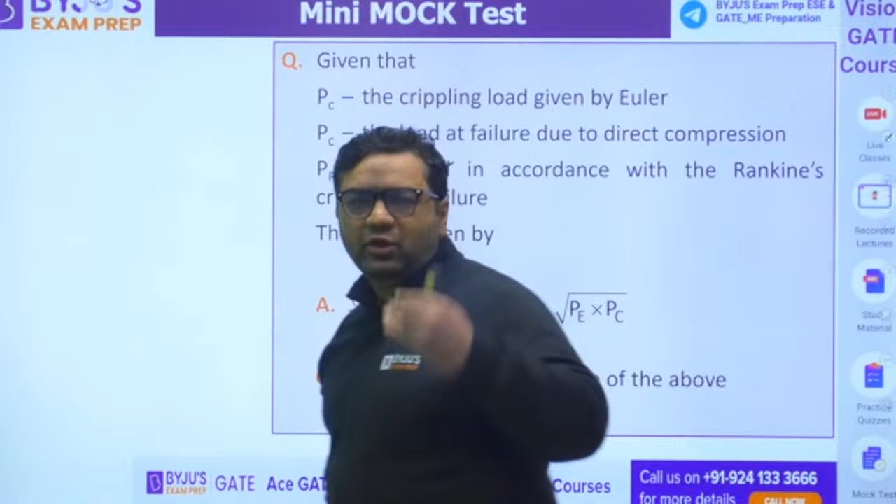Amit, don't worry. Admit card will come within today, tomorrow, because they are sending it one by one on mail. If it was coming on the website, it would be available at one instant only. But now as they are sending it, it will come today or tomorrow. Within 1-2 days, everybody will get it.

So guys, this is the very first question, which is from strength of materials. The topic is column - Rankine formula. This type of question has already been asked many times in ISRO papers. So tell me guys.

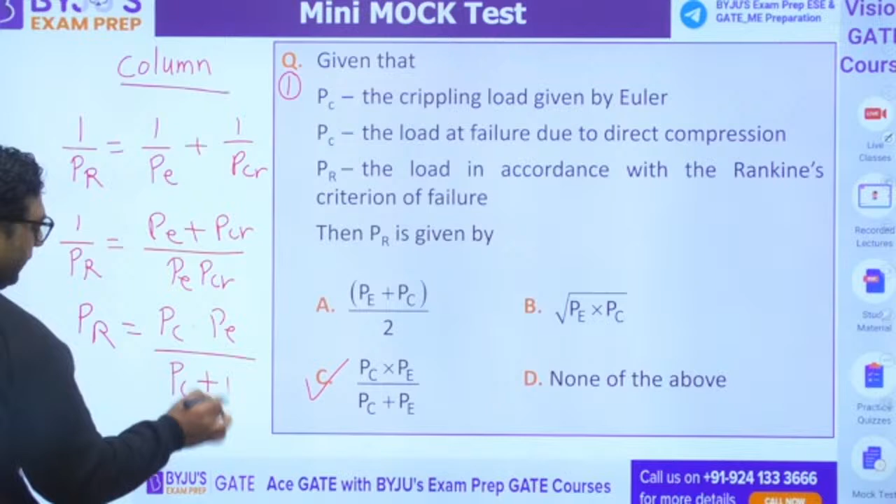Yes, Prathamesh, Amresh, Dhananjay, everybody agreed on C. Sarath, very good, and yes, you are correct. Answer is C, because when you write the Rankine formula, it comes out to be 1 by Euler formula plus 1 by crushing strength. When you apply this and solve, 1 by PR comes as (PE plus PCR) by PE.PCR. So PR, that is the Rankine force, will be PC.PE by (PC plus PE). So the answer will be C for this.

That's correct. Moving to the next question. Very good, Anonymous, Jay. Moving to the next question.

Question number 2, guys, you can see this question. In this question, the bending moment M and torque are applied on a solid circular shaft. Just solve this.

Voice is coming, I was just checking that. Question number 2, guys: bending moment M and torque is applied on a solid circular shaft. If the maximum bending stress equals the maximum shear stress, they are asking what is the relation between bending moment and twisting moment.

Akanksha, then there is no problem, na? That is happening, ISRO is every time happening like that only. That's why the papers are also available. Madhuri is saying A, Amresh is saying A, Dhananjay is saying A.

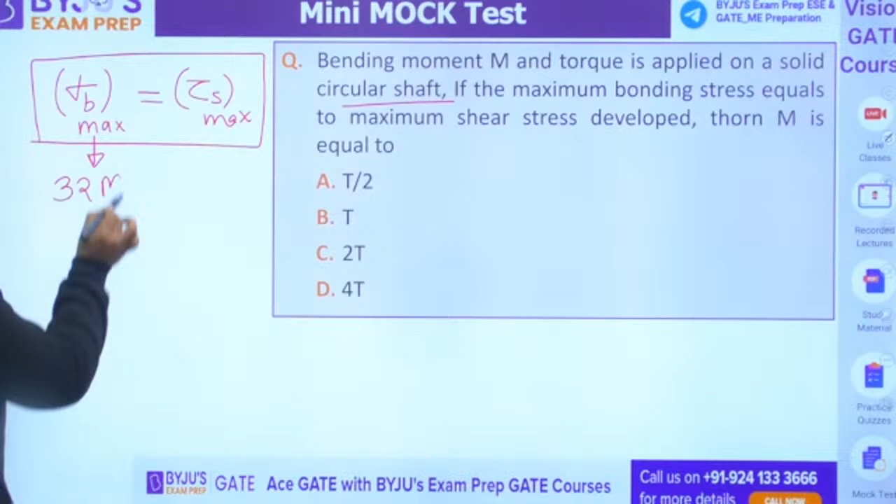The answer for this: you know the bending stress formula is 32M by pi d cube, and the twisting stress formula is 16T by pi d cube. So whenever you have a shaft like this, if you have a bending moment M, because of that the bending stress is this. And if a twisting couple is acting on the shaft, the formula is this. So if you know, pi d cube cancels out, this comes to 2. So M will be coming as T by 2, and I feel A is the correct answer. Dear, ISRO does not always have much calculative parts. Like this question, this is a PYQ of ISRO.

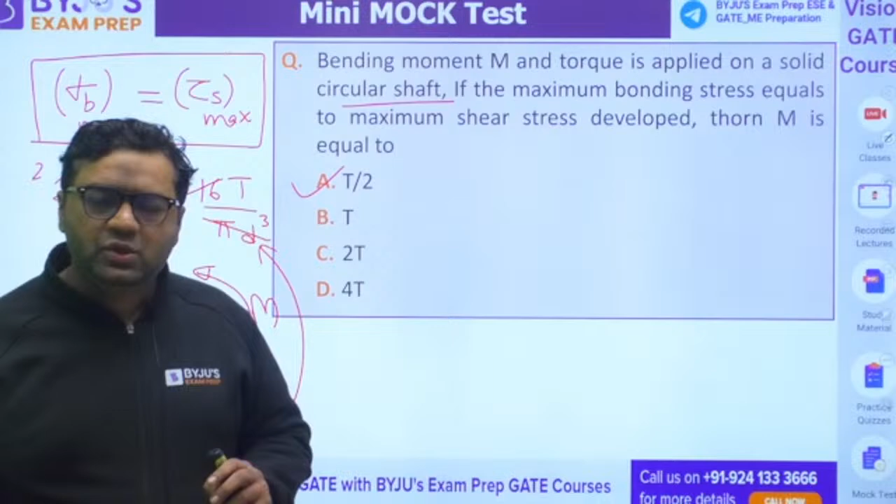So yes, some questions will be there in the form of numerical, but majority questions are conceptual. They are not asking mug-up kind of things. They are asking conceptual things like the previous 2 questions you have seen. That type of questions are more common in ISRO.

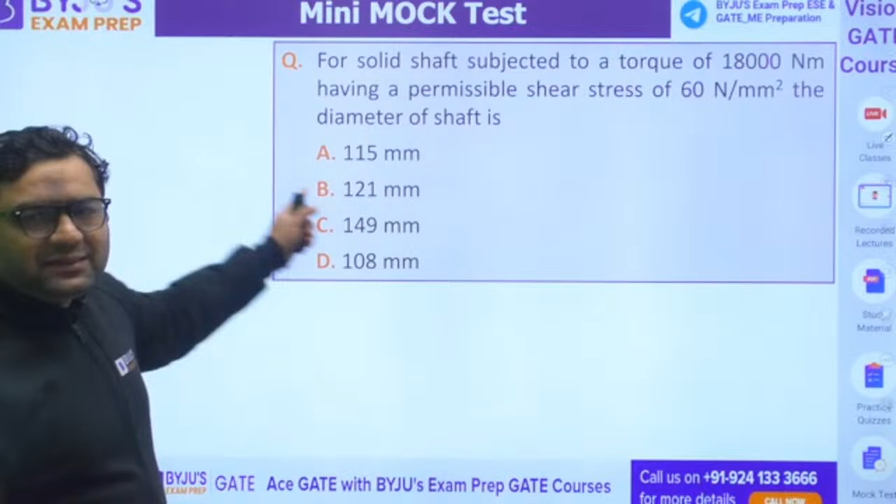So next is for a solid shaft subjected to a torque of 18,000 Newton meter having a permissible shear stress. This type of calculation can come in the paper, which are not very lengthy, but they will be checking with 5, 7, 8, 10 questions like that. So what would be the answer for this? They are saying for a solid shaft subjected to a torque of 18,000 Newton meter having permissible shear stress, you know that the induced maximum stress, we have just written the formula 16T by pi d cube.

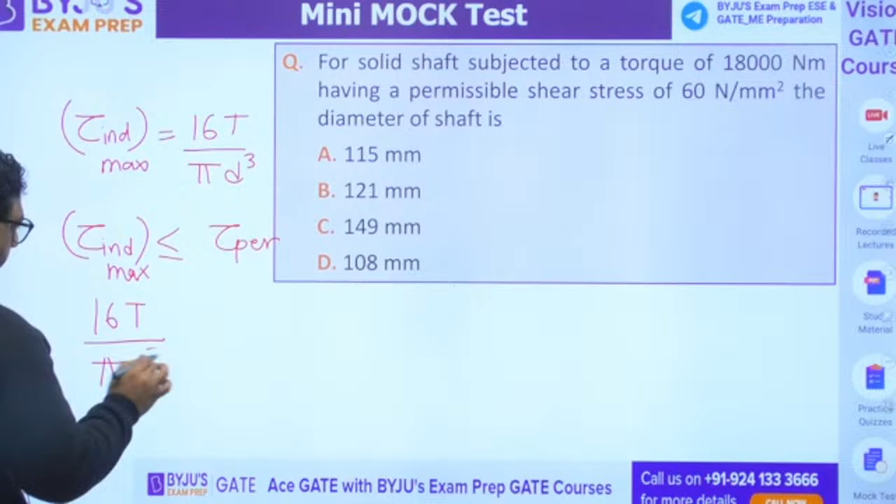So you would say the induced maximum stress is less than or equals to tau permissible. When we do that, you will be saying 16T by pi d cube is going to be less than or equals to, and here they have mentioned 60. So you just need to put the value and you will get the answer, diameter more than or equals to that, and that will give you the answer.

Sushmita is saying the answer is 115. What about others? Madhuri is saying A, very good. Sushmita and Madhuri have answered, what about others? Anonymous is also saying the answer is A, very good. Amresh and Dhananjay too. So I would like to say the answer is A.

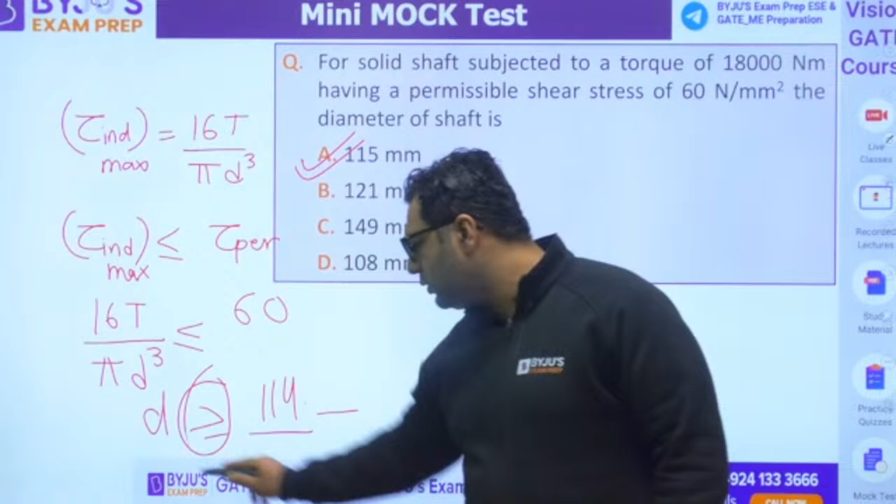It is coming out to be approximately 115, and as you can see it is more than or equals to. So if it is coming 114 point something, then the answer is going to be 115 because it is more than or equals to. So it's fine. If it is coming up to 115, the answer will be this. Answer will be A for this.

Moving to the next question. This is also a PYQ of ISRO. This question has appeared 3 times in ISRO, 3 times in ISRO. You can see what it is, shear forces. So this is a conceptual question, this is not a data based question. This is a conceptual question.

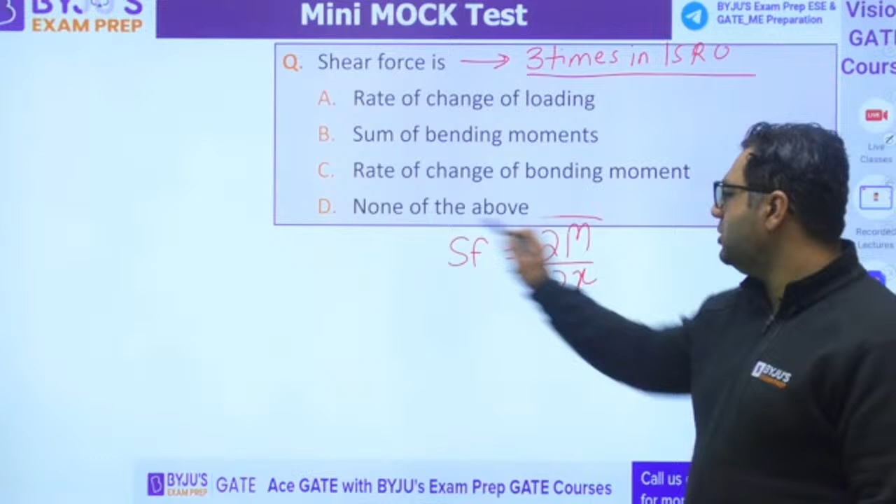Very good. So whenever we are looking for shear force, you already know that shear force is nothing but del M by del x. This is the relation between shear force and bending moment. So we will be saying C would be the right answer. Similarly, if they ask the relation between load and shear force, then load will be dV by dx, plus minus I am not writing, that is a matter of sign convention.

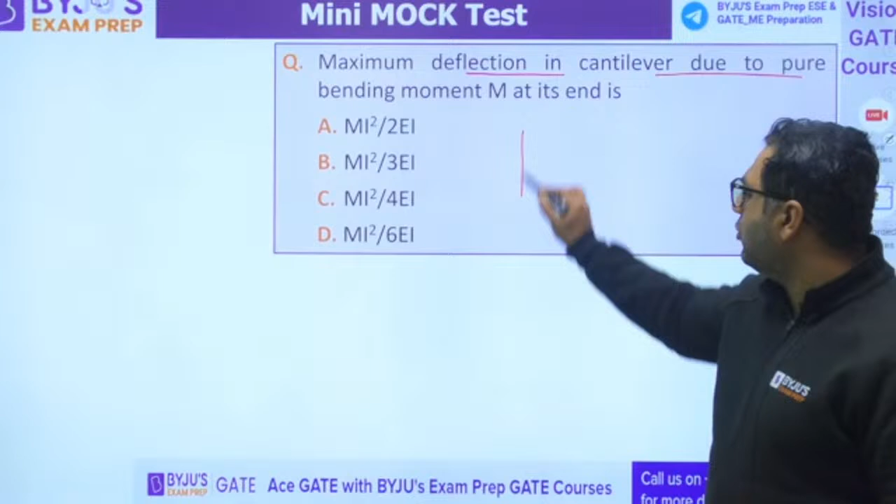Moving further, next question is maximum deflection in cantilever due to pure bending moment. This is also a standard table formula question, you can see that. So guys, in the next week we will be coming up with a full length mock test also, don't worry about that.

Very good, Aniket. Answer, you are saying B. All others are saying A. So the answer is A. When we are talking about this, this is the deflection.

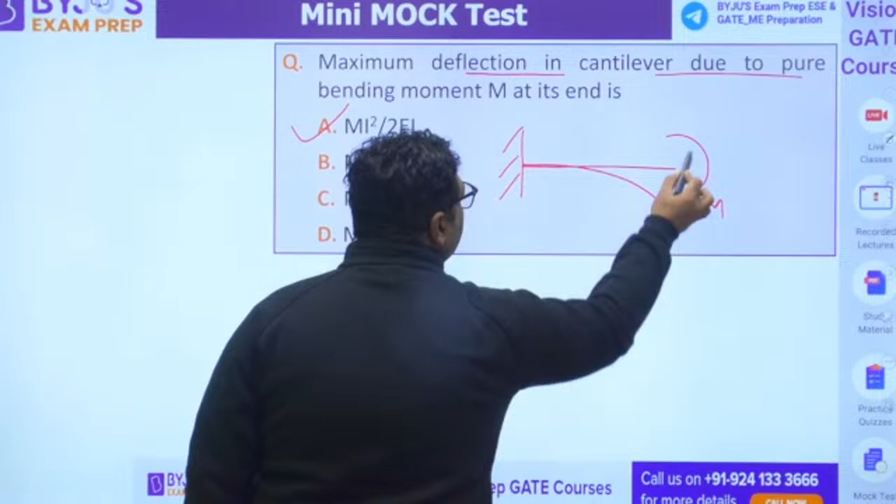So we would be writing deflection at A as minus ML square upon 2EI. Here minus indicates downward. And if you are finding out slope, it will be coming out to be ML upon EI. So for that you need to go for the standard table, 8 results, they come directly in the paper.

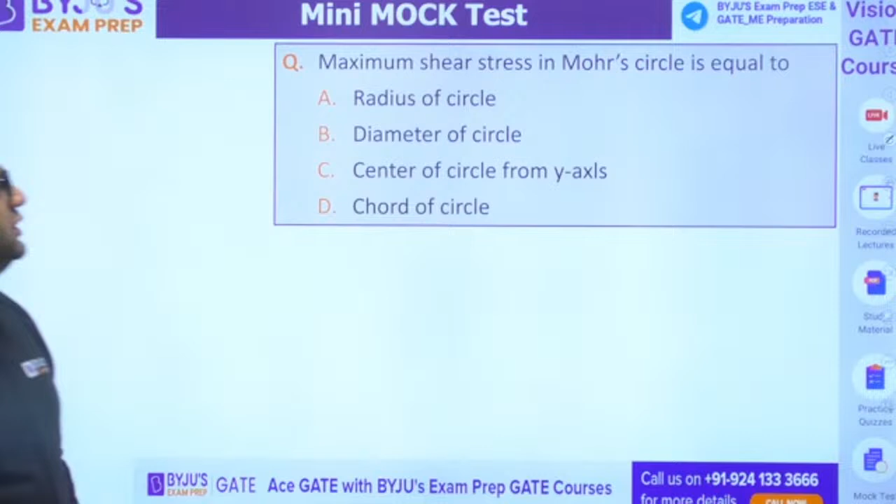Moving to the next question, guys. Next question is maximum shear stress in Mohr circle is equals to. This is also a PYQ of ISRO. So you may be thinking it is a very easy question, yes, they are asking some questions like that. 50% of questions in any paper are solvable by any student, after that only the difficulty level increases. 50% they make it such that if an average student is there, he can solve it.

Yes, you know that the maximum shear stress is nothing but given by the radius. This is the radius of the Mohr circle.

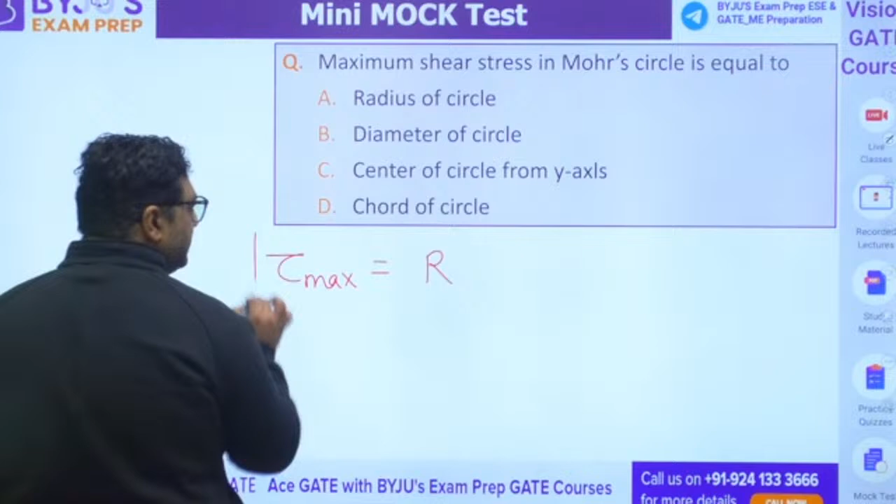So moving to the next question, guys. Next question is mathematics, next question is mathematics. The modulus of 1 plus cos alpha plus iota sin alpha, you need to tell the modulus of that. So you know, you can write this complex number 1 plus cos alpha plus iota sin alpha, and you know what the modulus is.

Square root of 1 plus cos alpha whole square plus sin alpha whole square. Solve it, apply some trigonometry and give the answer.

So this is question number 7, question number 7 it is, question number 7. Yes, what would be the answer?

Okay, Sarath is saying B. Sushmita is saying A. What about others? Sanket is saying B, very good. Thick skin is saying B. Tushar is saying B. Aniket is saying A.

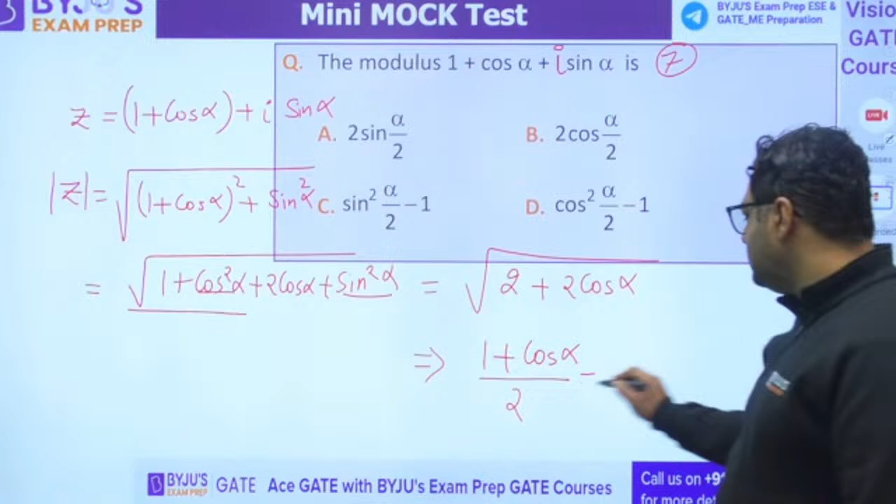Okay, let us see. So when you solve this, you will be getting 1 plus cos square alpha plus 2 cos alpha plus sin square alpha. Sin square alpha plus cos square alpha is going to be 1, so it will come out to be 2 plus 2 cos alpha. You already know that trigonometry relation: 1 plus cos alpha by 2 is cos square alpha by 2. So using this relation you will get the answer to be 2 cos alpha by 2.

B is the right answer. B will be the right answer for this. Very good, guys. Moving to question number 8.

Question number 8 from production. They are saying materials after cold working are subjected to the following process to relieve the stresses.

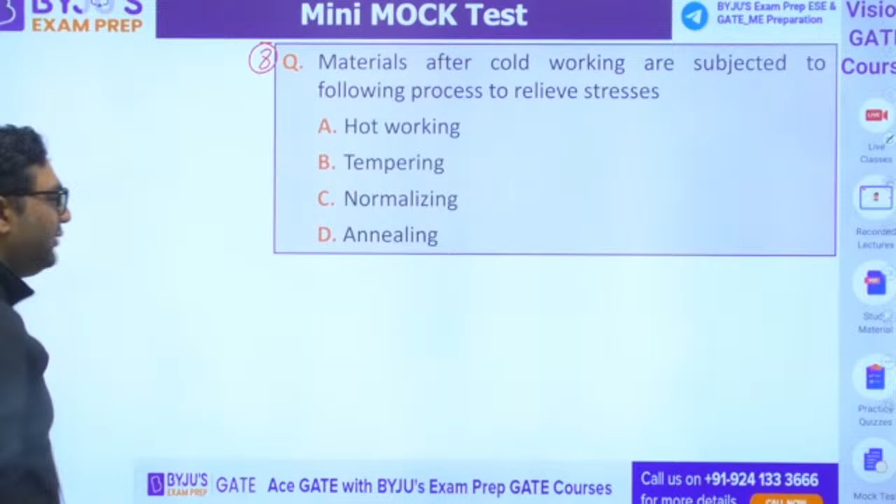Annealing. Annealing is done because whenever we go for cold working, ductility gets reduced. Strength increases, hardness increases, brittleness increases. So to improve the ductility, because if you talk about rolling or wire drawing, there are multi-pass operations, we need to improve the ductility. For that we go for annealing. And stresses also need to be relieved.

Question number 9, drop forging. This is also a PYQ. Some questions today I have taken from previous years. Okay, this is also a PYQ.

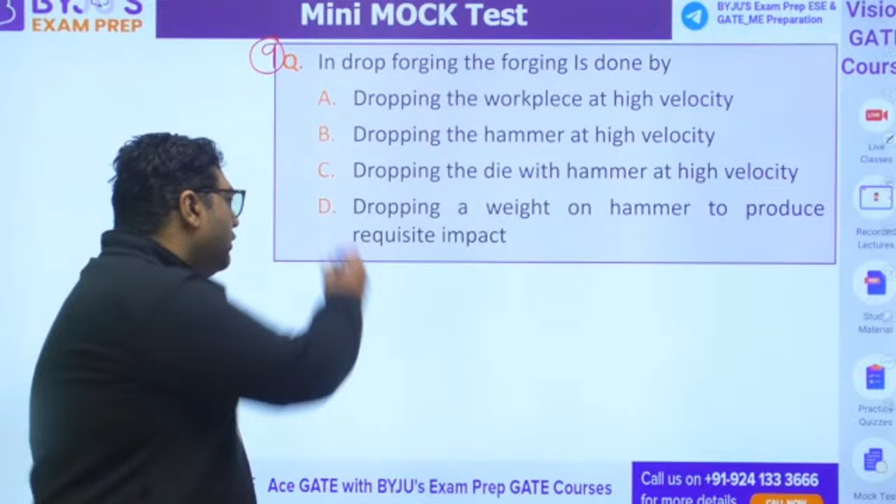So they are saying: dropping the workpiece at high velocity, dropping the hammer at high velocity, dropping the die with hammer at high velocity, dropping a weight on hammer. Actually, saying that dropping the weight on hammer is not correct, because the hammer itself is the weight which is going to fall over the die.

We are having the dies, like this is die, this is die. On the dies the hammer will come. This is hammer. So hammer itself is a weight, right? So the answer will be B for that. So B is the right answer. Okay, yes.

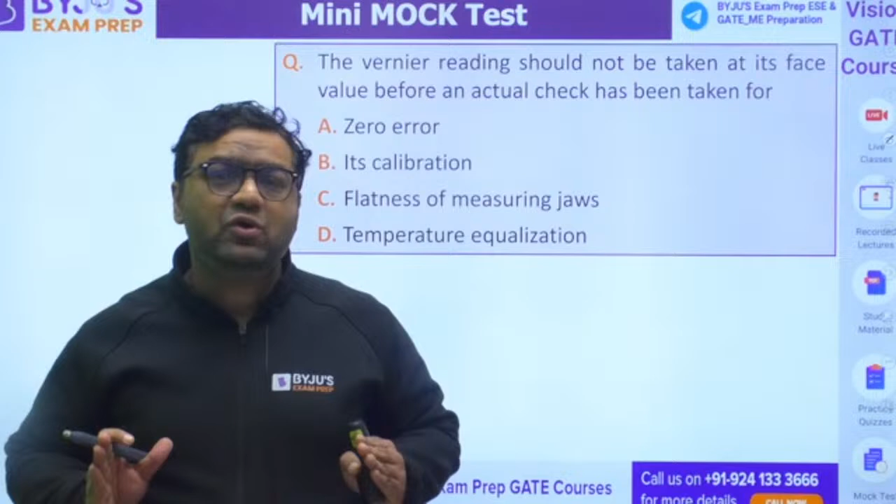So this time they are saying the vernier reading. This is from metrology inspection. The vernier reading should not be taken at its face value before an actual check has been made.

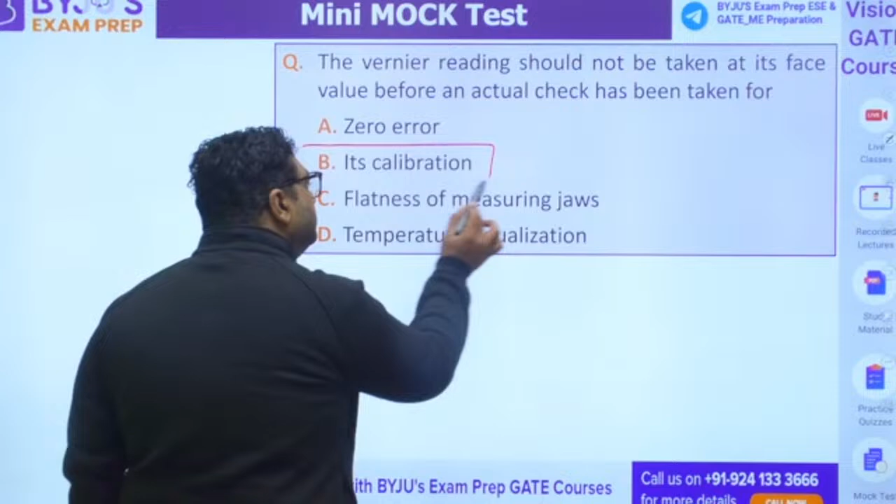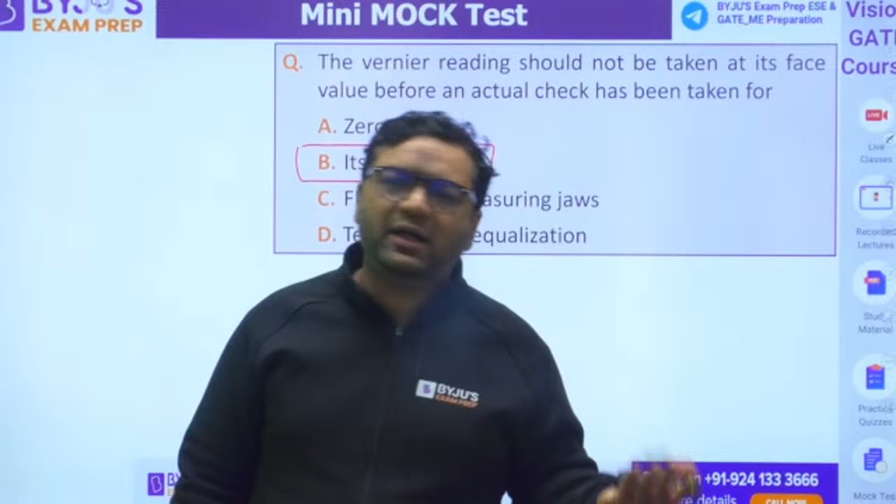Its calibration. Whenever we are going for any measurement, before that calibration is required. Because whether error will be coming or not, that is the secondary thing, but calibration is done. Even when you go to a Kirana shop and he is going to give you some sugar or anything, he first sets the weighing machine to zero, otherwise you will not get the correct thing. So that is why calibration is the first thing which is done.

So the answer will be B for this. Moving to the next question. The temperature of the sun can be measured using a. This is from thermodynamics.

Dear, actually whenever we are going to use any device, like a weighing machine, what will you do? First of all you will set the zero, right? Yes or no? So you will set the zero, otherwise that will not give you the correct reading.

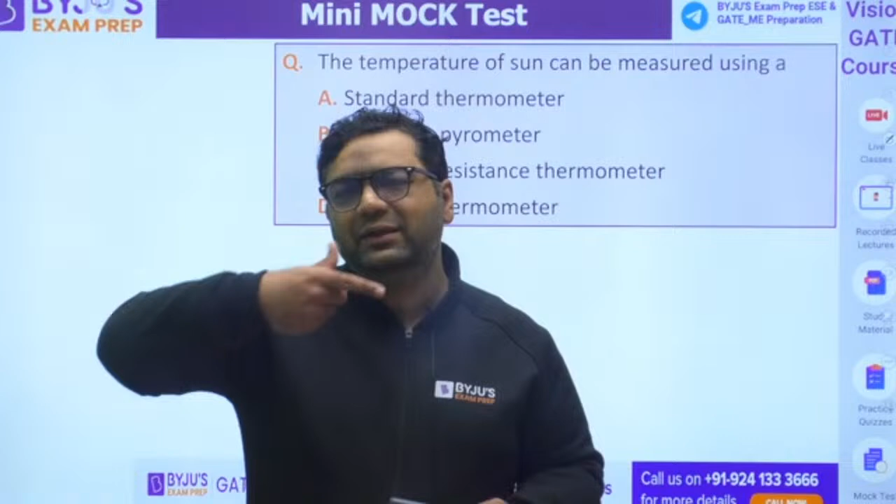Let us say I have used a vernier caliper before and on that already some gap is there. Then will you start without checking the calibration? Calibration means zero should be set on zero. Because if any problem is there previously in the device, that should not come into the calculation.

Okay, you got it? So the answer for this: the temperature of the sun can be measured by radiation pyrometer, because we cannot go and touch the sun to see the temperature. For that we need to go for...

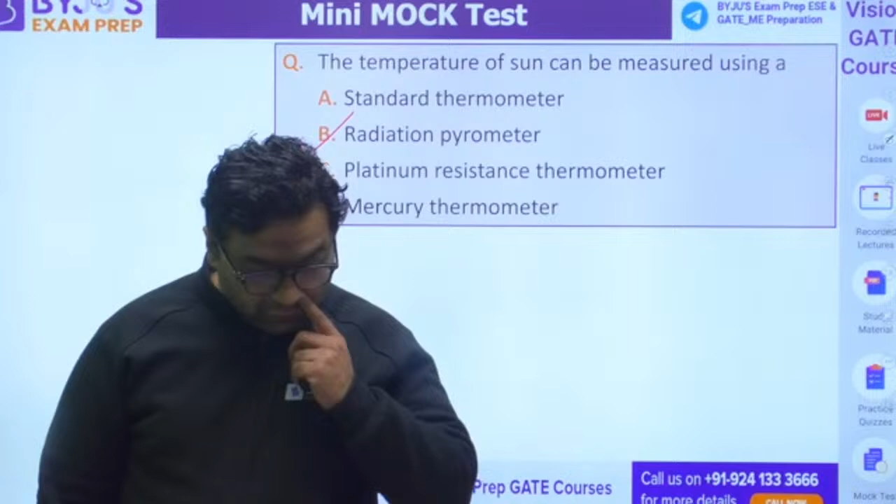Dear, this is question number 11. This is question number 11. Okay, moving to the next question. Question number 12, this is from engineering mechanics.

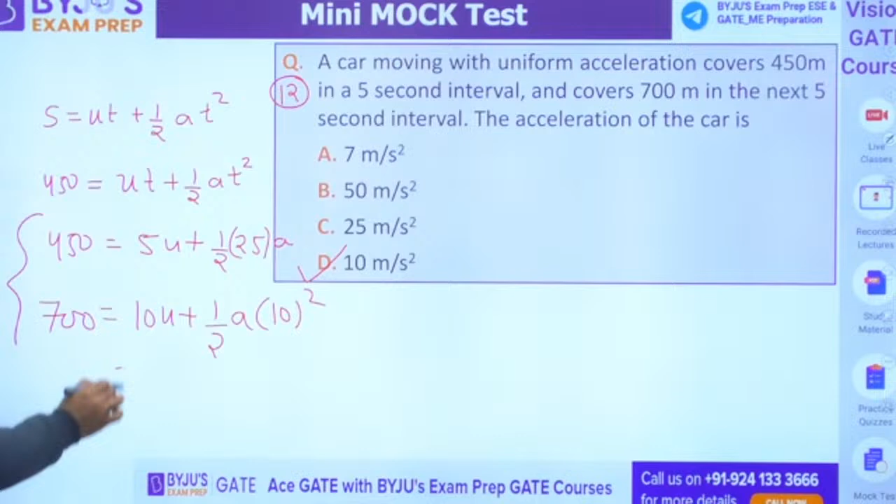So they are saying in the first 5 seconds, time is given as 5 seconds, so you will say 450 equals 5u plus half into 25a, since we don't know the initial speed. Then in the next 5 seconds it covers 700 meters, so 700 equals 10u plus half a into 10 squared. When you solve these two equations, you will get the value of u and value of a, and a will come out to be 10 meter per second square. D is the right answer.

Okay, moving to the next question, guys. Question number 13, this is also from engineering mechanics, and this question is also from PYQ. This is from ISRO 2010. Solve this question, guys.

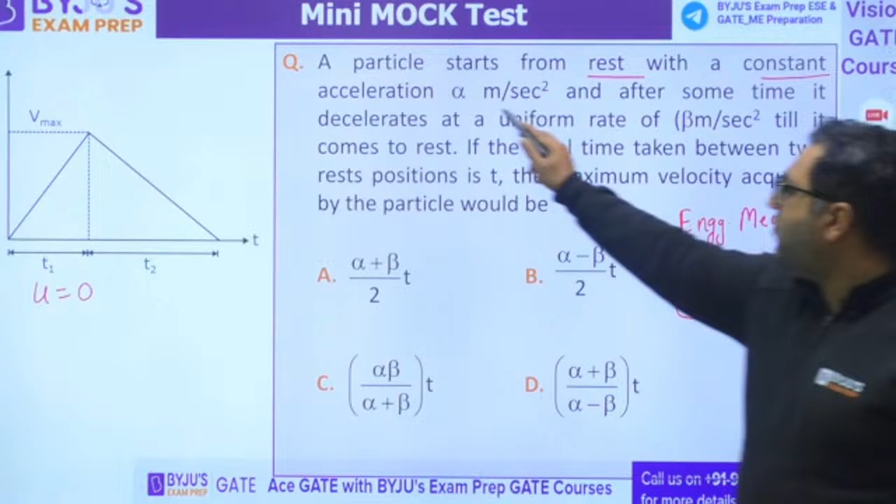So here some graph is given, 0 to T1, T1 to T2. Let us see how many of you give the right answer for this question. Already Sanket and Madhuri have given the answer as C, which is correct. A particle starts from rest, so obviously U is going to be 0, then has constant acceleration alpha meter per second square, and after some time it decelerates at a uniform rate of beta till it comes to rest. If the total time taken between the two rest positions is t, the maximum velocity acquired by the particle is... Yes, guys.

So you know that V equals U plus AT. If you apply that, velocity will come out to be alpha times T1. Also you can apply V equals U plus AT, U is 0, so you will have alpha T1 minus beta T2, because initially it is acceleration, then deceleration. So when you say T2 is nothing but T minus T1, putting this equation here, we find the initial velocity is 0, this is the final velocity, this is Vmax, and this is V at this location, which is also going to be 0. So you get alpha T1 equals beta T2, from here you can get the value of T1, put the value of T1 here, and you will get the answer to be C.

I feel everybody is getting this. Yes, everybody understood? C, very good. Shall we move further? Shall we move further?

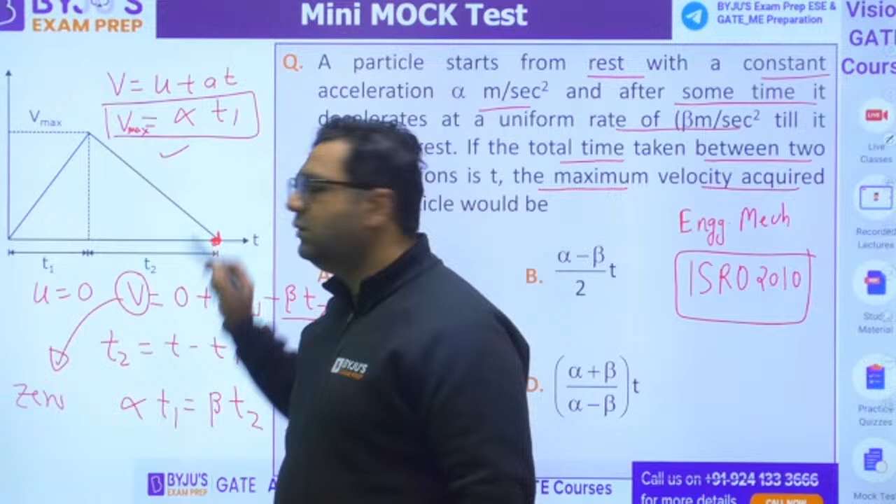I feel everybody understood, simple mechanics concept. Why is final velocity 0? Because you can see this is initial, this is final, starting from 0 and ending at 0. This is accelerated, this is retarded.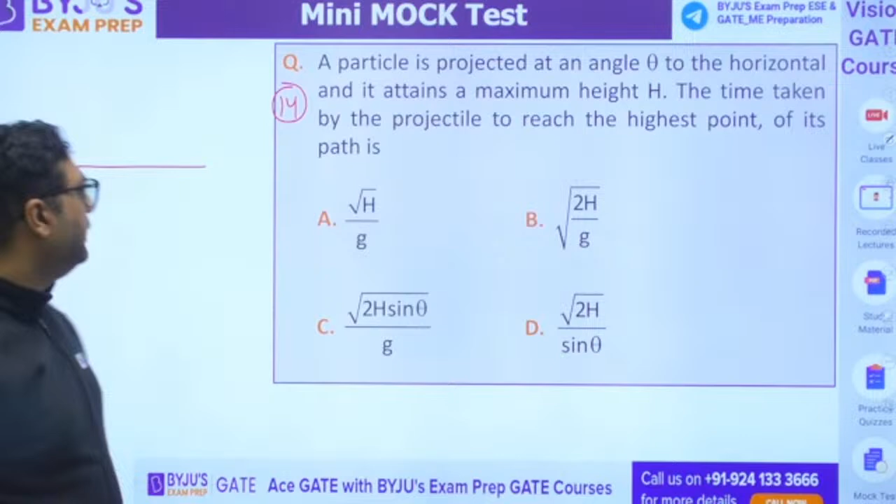Next question, guys, a simple question from projectile motion, engineering mechanics again. Question number 14, 16 questions are still left. A particle is projected at an angle of theta to the horizontal. It attains a maximum height h. The time taken by the projectile to reach the highest point of its path - so this is the projectile, with u and theta. They are asking the time taken. What would be the time taken, guys?

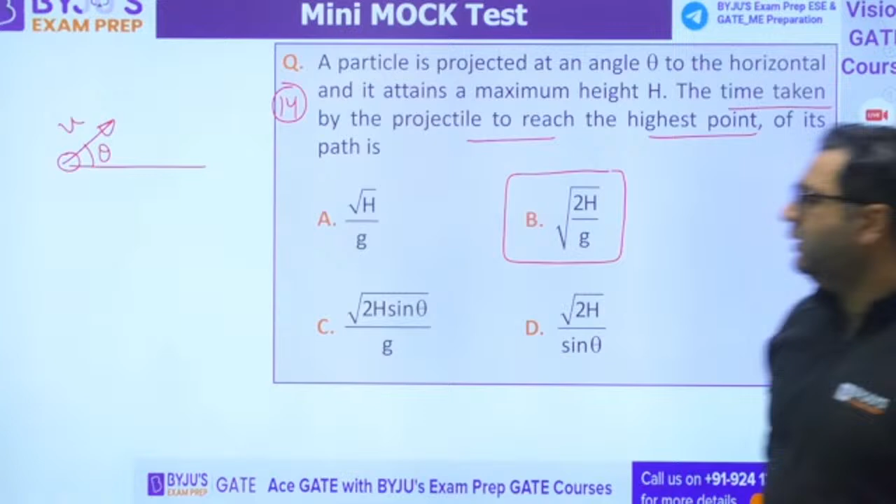Yes, everybody is getting B. This is a very simple and famous question, you would be getting the answer as B. They are asking you the time taken by the projectile to reach the highest point. So you assume the highest point has a height of h. This is the motion in the y direction, so uy is u sine theta, acceleration in the y direction is minus g, and the distance travelled is h. You need to find the time of ascent, so the answer comes out to be square root of 2h by g. I feel everybody can do this, it's a very easy question.

Moving further, next question is once again from strength of materials. This question says a cantilever beam AB of length L with uniform flexural rigidity EI has a bracket AC attached to its free end as shown in the figure. A vertical load is applied to the free end C of the bracket in order that the deflection of point A will be 0. Find the ratio of A to L.

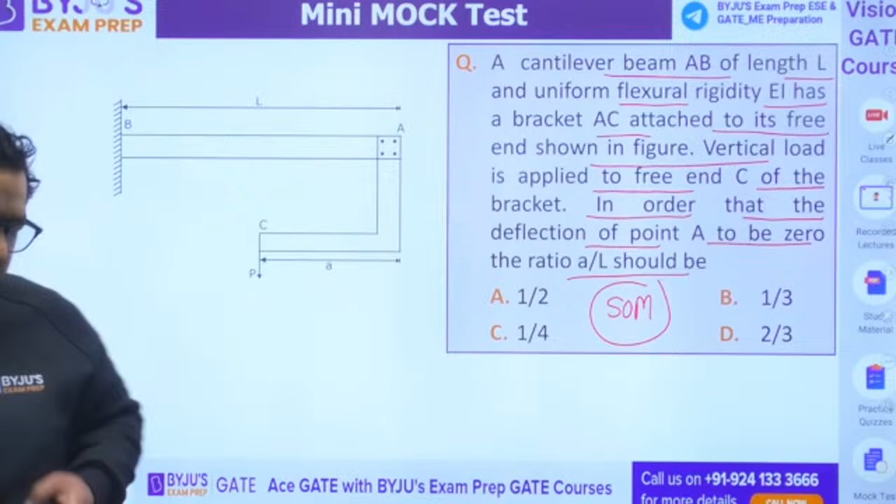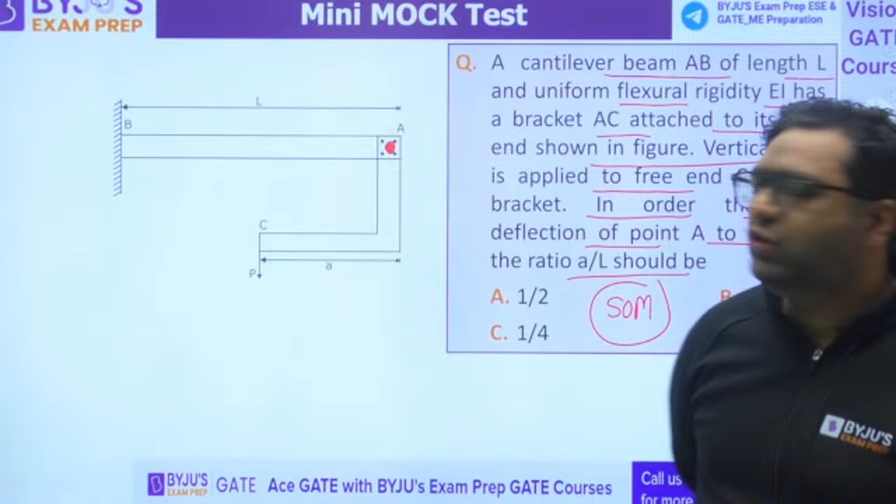This is a conceptual question, not very high on calculations, only standard results are required. They are saying the deflection of A is going to be 0, and this will be solved using the free body diagram. I can see Sanket has given the answer as D. What about others? Okay, Madhuri is also saying D, very good, very quick answer. What about others? How will you solve it? By free body diagram, so I am showing you the solution on the next slide.

So if you see, this is the figure given. This distance is A, this is L, and this is the load P. If I say this is A, this is B, this is C, I would be having the BC part separated, with P load acting on it. To balance this P, this AB beam will be holding the BC part with a reaction, and also this is creating a couple. So to balance that couple, a bending moment of P into A will also be applied. These are applied by the AB beam on BC.

The same will be replicated as Newton's third law of motion on the AB part. This is A, this is B. As this is acting upward, the reaction will come downward, and this is clockwise, so here we will have anti-clockwise, which is P into A. So now, to balance this, the AD beam will provide a P in this direction and a couple in this direction, once again P into A. As a result, when you see the part DA, as this is acting upward, the reaction will come downward, and since it is clockwise, it will come anti-clockwise.

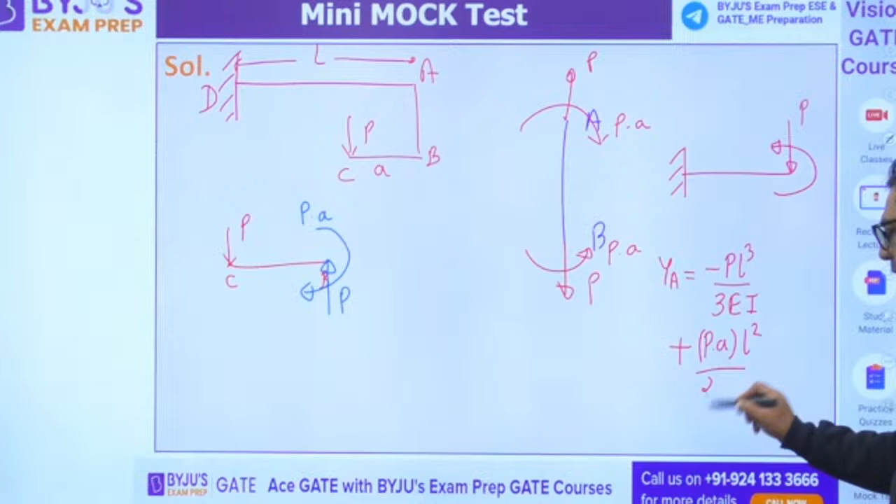So now, to write down the deflection at A, it comes out to be minus PL cube upon 3EI, that is PL cube upon 3EI negative downward. Then, because of the moment, the bending moment P into A gives ML square upon 2EI. When you keep this equal to 0, you get the relation between A and L, and the answer comes out to be 2/3. This is a very good question.

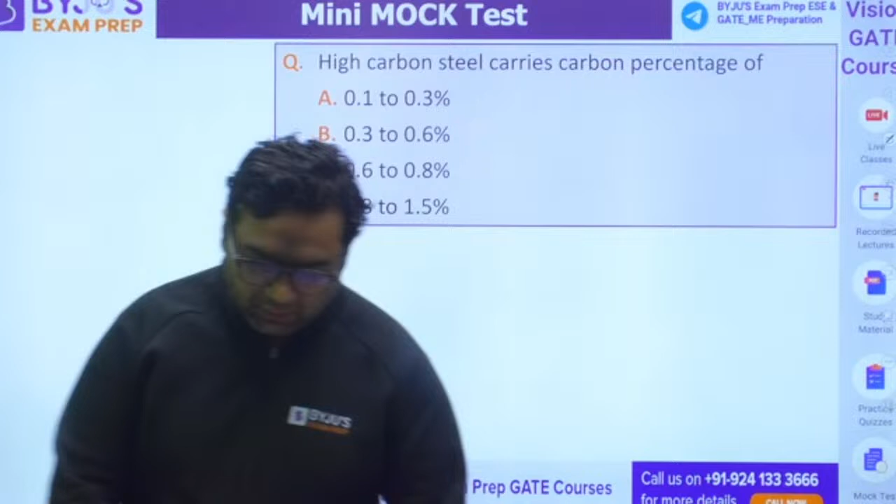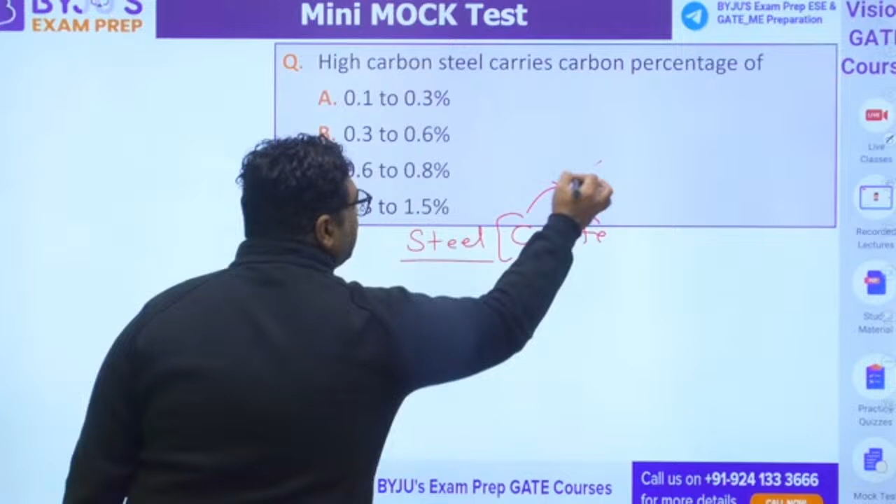Yes, this question number 16. So my dear, whenever we are talking about steel, steel means we have carbon in iron, but carbon is less than 2%. After that we call it cast iron. Steel is a solid solution.

Based on the carbon percentage, we have low carbon steel if carbon is less than 0.3%. Second is medium carbon steel, when carbon is less than 0.6%. And we call it high carbon steel if carbon is less than 2%, more than 0.6%.

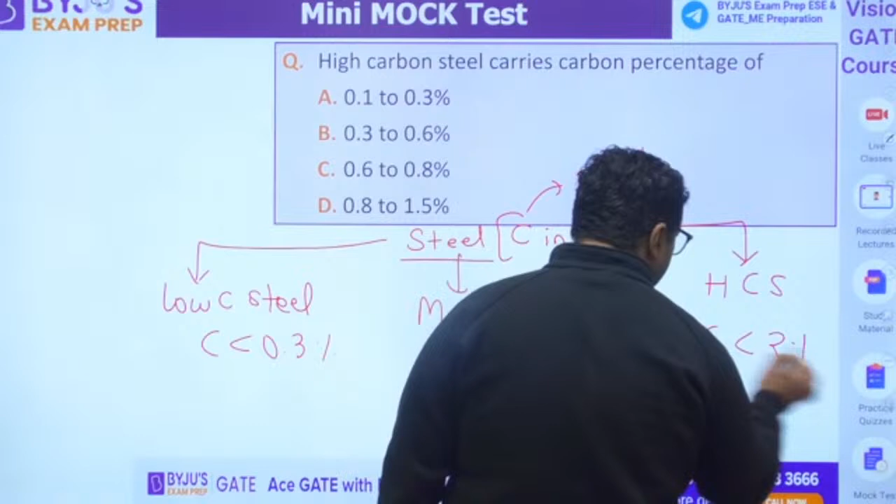Guys, if you see these options, there are multiple options which can be correct. 0.6 to 0.8% is also high carbon steel, 0.8 to 1.5% is also high carbon steel. But in ISRO we need to select only one option, so the most appropriate will be this one, because up to 1.5% has more range. So we will go with D here.

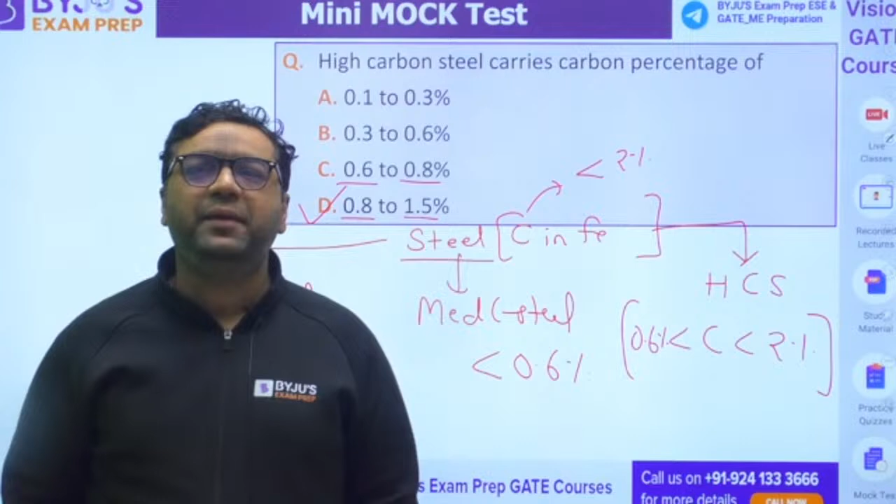Sir, in DI question, I think some possible... I did not get which question you are saying, Amresh. Are you talking about the previous question? I feel we have done it. Are you asking about the forging question, Amresh? You do one thing, after the class share the screenshot of that question with me, then I will clarify you.

Next question is this. This is related to shock.

So drop forging question, if you have any doubt, share it with me personally, I will check it. Otherwise, whatever I am saying is correct, because whenever we talk about the hammer coming from the top onto the die, the dies are placed like that. So if you say hammer is also there, then some weight will be coming, that kind of thing can be said to be some kind of manipulation.

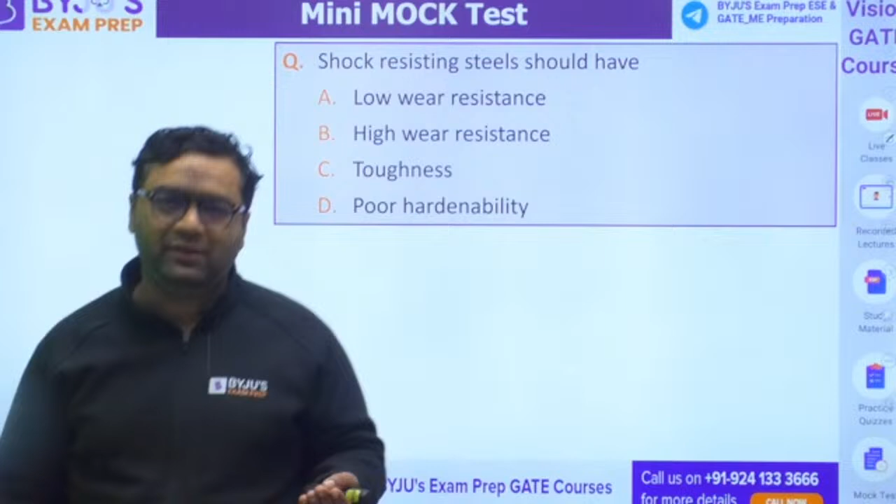Shock resistance steel, shock resistance comes from toughness. That is why we think of more toughness in cutting tool materials. So the answer will be C for this. Everybody - Amresh, Tushar, Amit, Nikhil, Sanket, Madhuri and Manoranjan - have given the right answer.

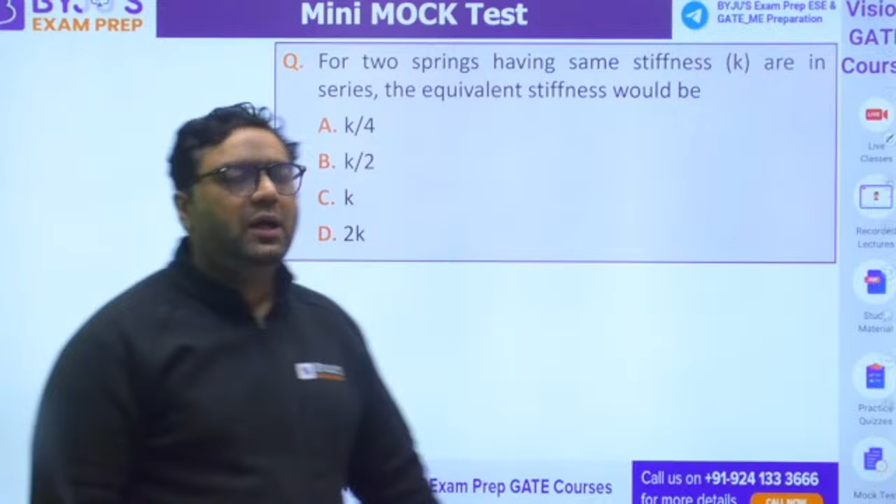Moving to the next question: for two springs having same stiffness in series, its equivalent stiffness will be. Very simple question, and this is also a previous year question of ISRO.

So, Aniket, if you have any such doubt, ask separately, okay? Here the question is going on springs, you are asking about production. It will disturb the entire class. If you want to ask something like that, ask either at the end or separately. In between it is disturbing.

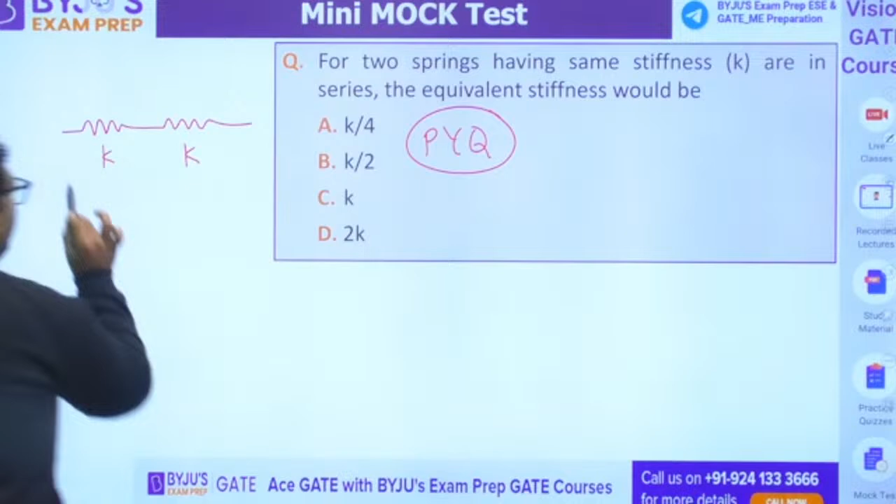Okay, what would be the answer, guys? We have two springs having stiffness K in series, this is one spring, this is another spring. If they are in series, you know that 1 upon K equivalent equals 1 upon K1 plus 1 upon K2, so 1 by K plus 1 by K. So the answer will come out to be B, K by 2 will be the right answer.

And this question is question number 18. We are still left with 12 more questions. Question number 19 in front of you.

Fine, Nikhil and Sanket, what would be the answer for this question guys? There are two vectors. Vector A is i cap plus Cj cap. Vector B is j cap. And the angle is also given as 45, so theta between them is 45 degrees, and they are asking you the value of C. Yes, solve it guys, solve it.

You know that the dot product of two vectors can be written as, cos theta equals A vector dot B vector divided by magnitude of A into magnitude of B. This will give you the value of C, because you know theta is 45, so cos 45 degree equals A dot B. You know that when you go for A dot B, what will you get?

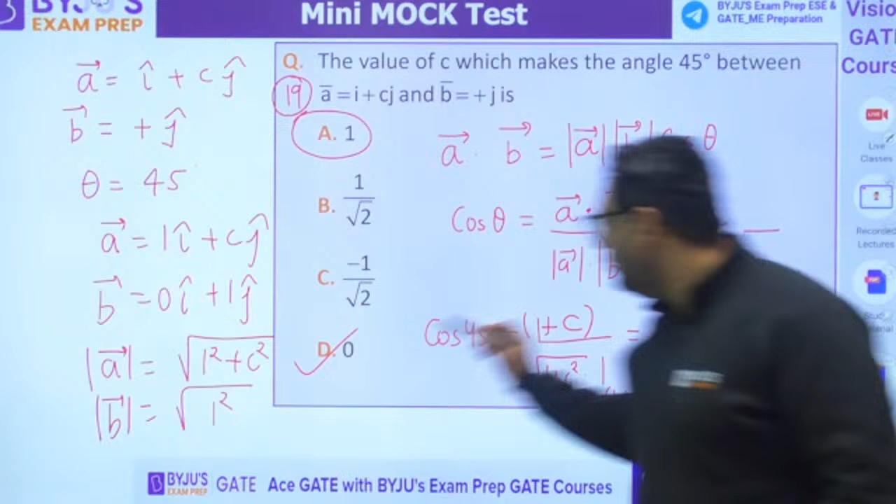Okay, you solve it, what is coming? Yes, I feel 1 will be the answer. Yes, A is coming. So guys, I feel you can calculate it, it is right in front of you. A into B will be equal to C only. I have calculated that too, but I feel I have written it wrong.

When we get this, then what is the answer? 0. Okay, you calculate here, either it will come out to be 0 or 1. Please check and tell me, are we getting 0 or 1? Please tell me, because only this calculation is left now.

When you square both sides, this will be C square. I feel C square will get cancelled out. So you would be having C square into 2 equals 1 plus C square. Tell me, is it coming 0 or 1? Are we getting 1? Or shall I redo the calculation? Have I made some mistake? Everybody getting 1? Okay fine, then the answer will be A.

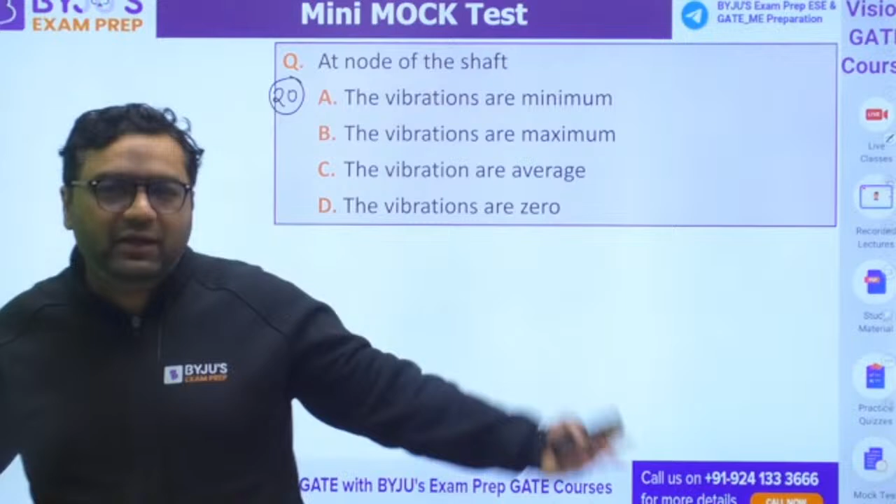Okay, let's move to question number 20. This is from vibrations. Brother, keep checking the calculations, I can make mistakes too. Because you guys are giving the exam, I haven't given one in the last 10 years, so you should be stronger than me in the calculation part.

Okay, so what will be the answer? Are the vibrations minimum, maximum, average, or 0 at node? At node the vibrations are 0 because that is how we characterize a node. In torsional vibration, if you have a shaft and a disc, when you provide torsion, the shaft twists such that here the angle is 0 and here the angle is theta. So there is a linear variation of theta, and this point acts like a node, meaning 0 vibration. So the answer will be D for this.

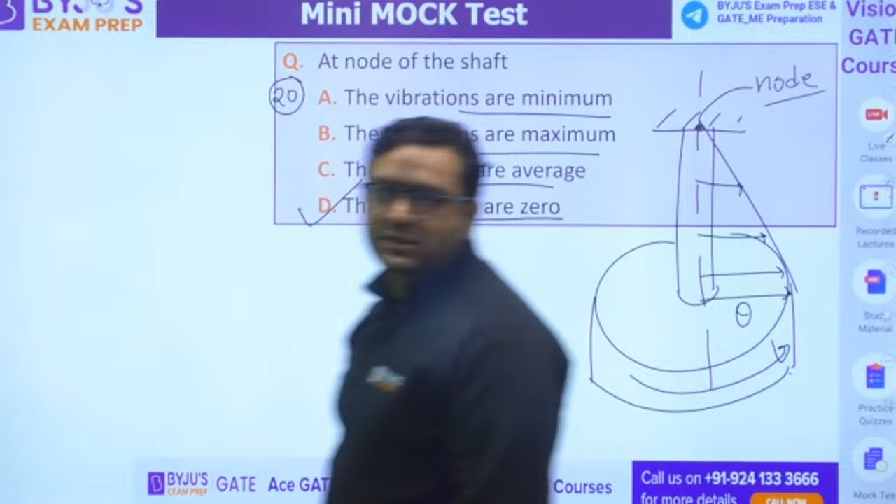Very good, moving to question number 21, guys. This is once again from production. They are giving some properties: malleability, hardness, resilience, isotropy.

Whenever you get such a question, you need to go for the most appropriate option. I can give you a hint: direction is somewhere related to isotropy. Then, hardness is somewhere related to indentation. So B is connected with 4 and D is connected with 5. You can see D is given 5 in either B or D, so the answer will be from either B or D. And B is given 4 where that will be your answer.

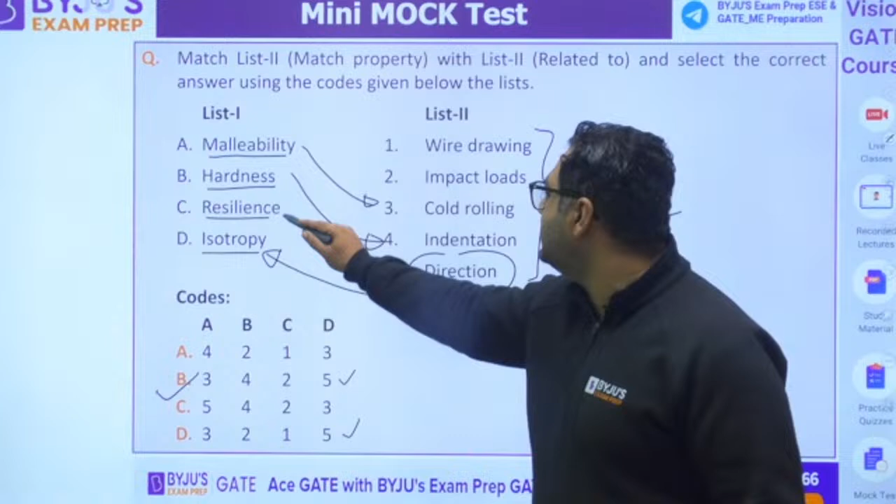I feel everybody can see B is going to be the answer. From that you can say malleability (A) is connected with cold rolling, and resilience (C) is connected with impact load. These are questions where you need to check 1 to 2 cases; checking those will give you the right answer, and we need to go for the most appropriate option.

Moving to the next question guys. This is question number 21 or 22, I feel. The cutting speed of the tool of a shaper—it's question 22.

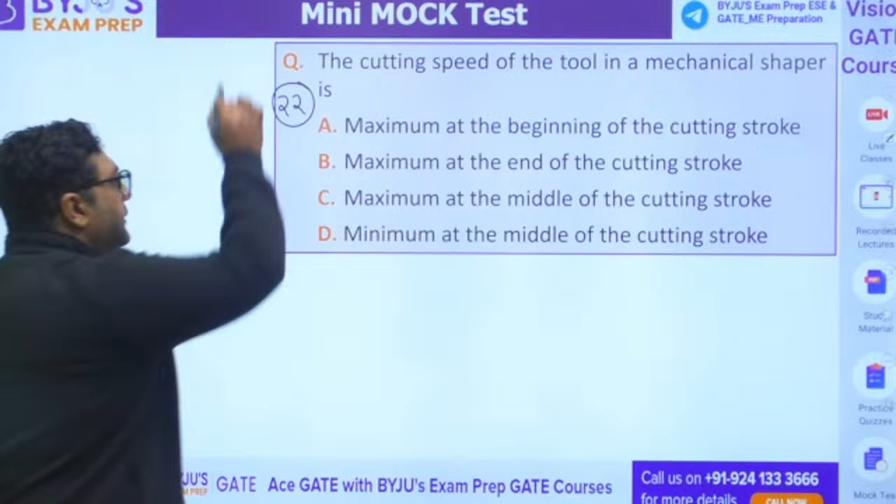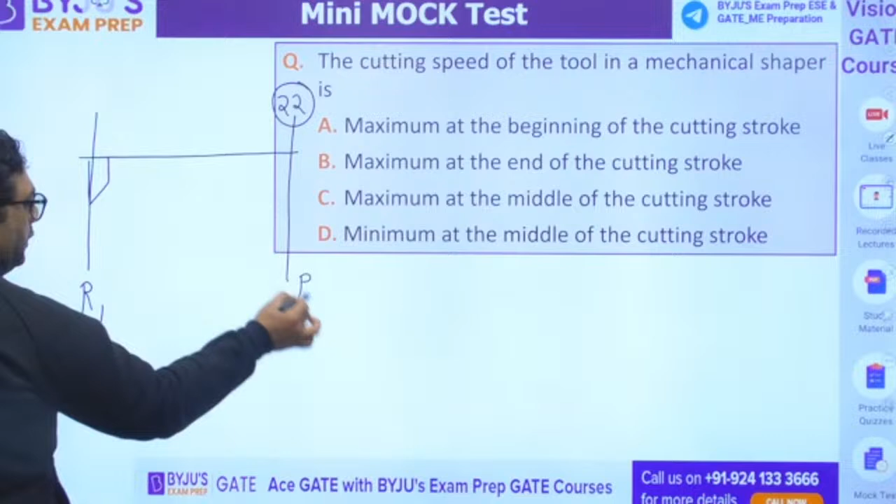What would be the answer? When the cutting speed will be maximum? You know that whenever the ram travels in the shaper and planer, it starts from R1 and ends at R2. At R1 velocity is 0, at R2 velocity is 0, so it will be maximum at the center. Forward stroke is slower, return stroke is maximum, so velocity is maximum at the middle, obviously. Beginning cannot be correct, end cannot be correct, so it is maximum at the middle. C would be the right answer.

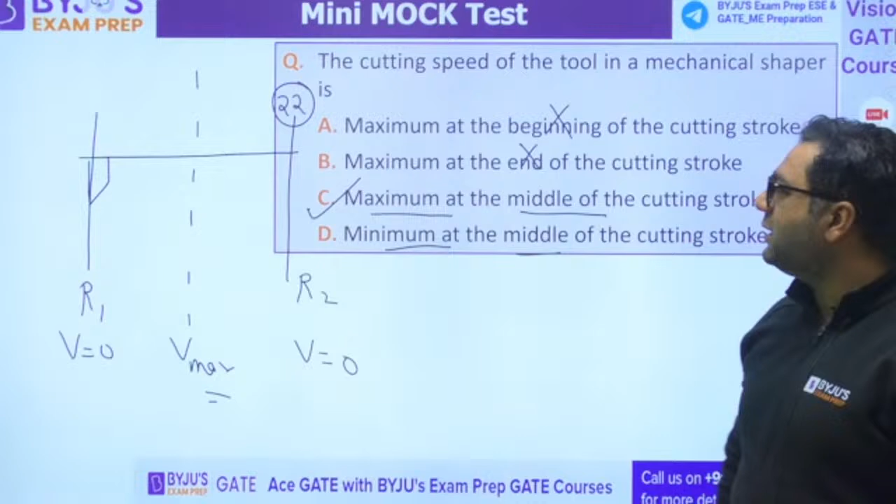Question number 23. This is from welding. Which is not the correct statement about the function of flux in brazing? This question is question number 23.

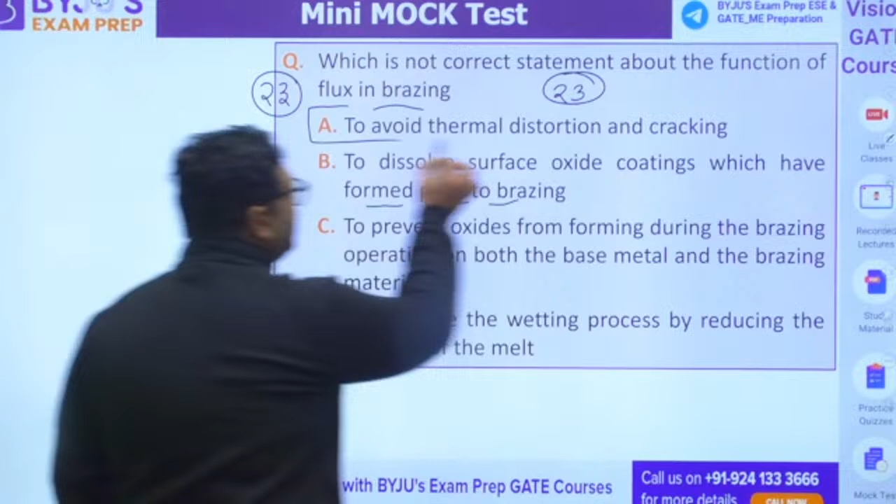The options are: to dissolve surface oxide coating which formed prior to brazing, to prevent oxide from forming during brazing, to facilitate the wetting process by reducing the viscosity of the melt, and to avoid thermal distortion and cracking. I feel everybody can understand that flux has nothing to do with this, because that depends on preheating or post heating. So the answer is going to be A.

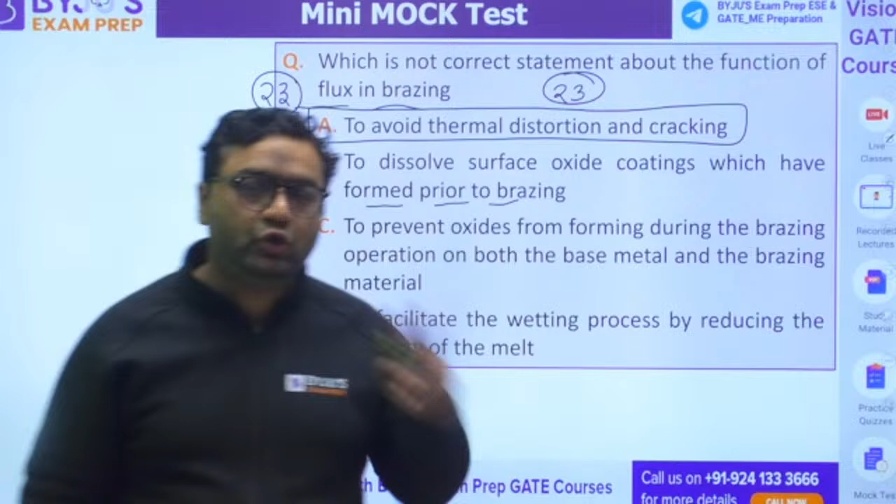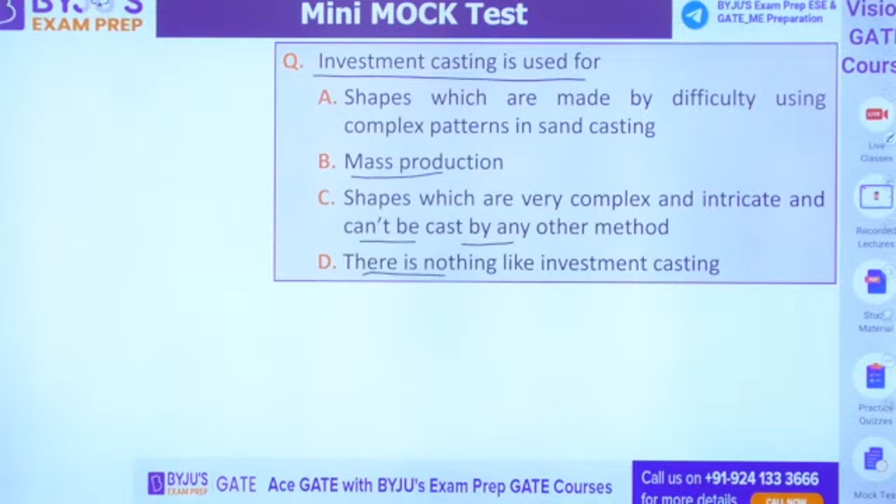So here, you will be having a tie between A and C. Then this word, intricate, that you must have listened to in investment casting. So guys, we are going for option C, because yes, we are going to use it. And one more thing, if there would be any option related to surface finish, then that would be the answer, because the surface finish we get in investment casting is best, since we are using the wax pattern there. So the answer for this will be C.

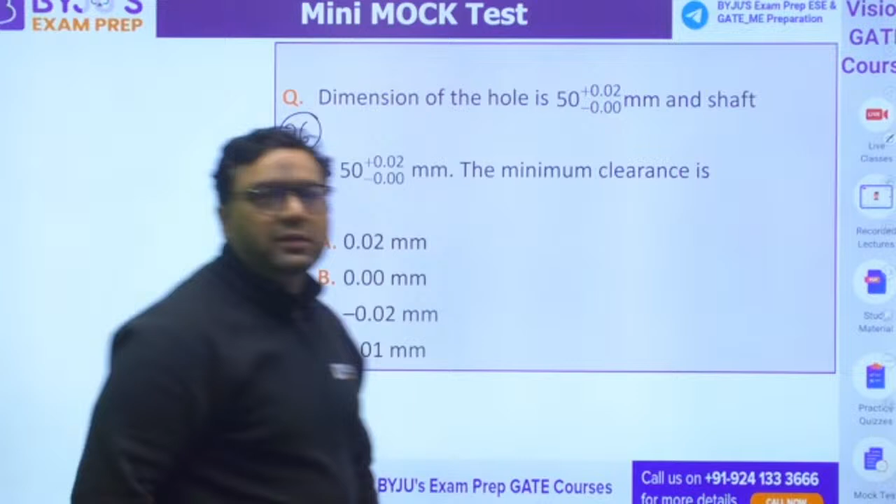Moving to the next question. This is from metrology, question number 26. We are left with 4 more after this. You need to find out the minimum clearance. The dimension of the hole is given to you, and the dimension of the shaft is given to you. So I am telling you, the dimension of hole is this, and the dimension of shaft is this.

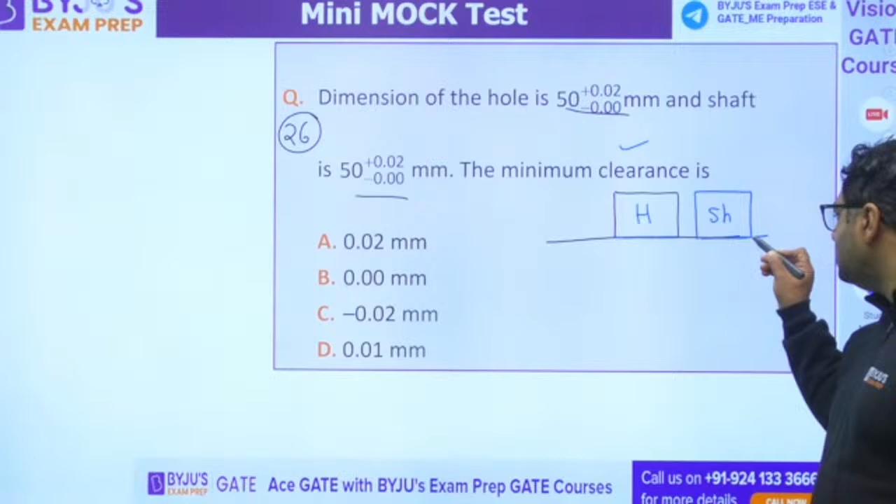This is hole, this is shaft. Tell me what would be the answer. The minimum clearance they are asking. Minimum clearance will be when hole and shaft are both of this size. And maximum clearance will be when shaft is of this size, hole will be of this size.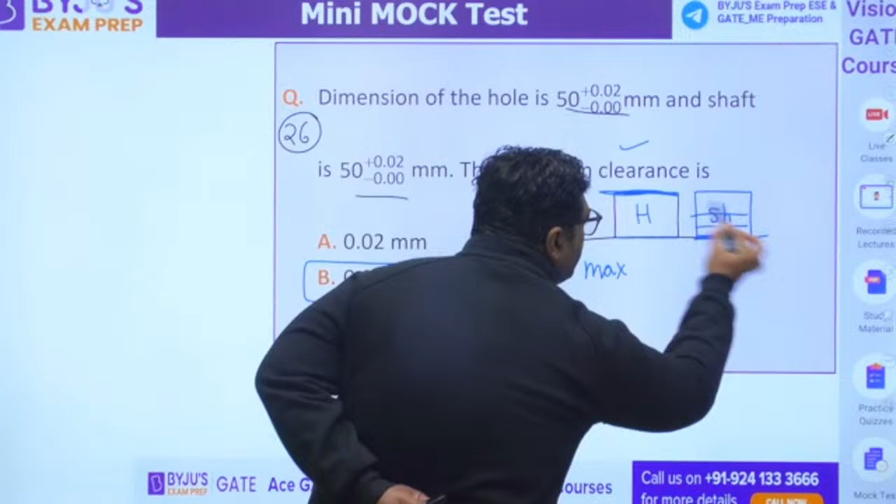Obviously the answer should be B, na? If they ask the minimum clearance, then this is shaft size, this is hole size. So answer will be B for this. Everybody agreed? Because any size from this I can choose for shaft, and any size from this I can choose for hole. So when I choose this size of hole and this size of shaft, the same size of hole and shaft will give you 0, 0, 0. B will be the right answer.

Moving to the next question, guys. Question number 27. If anybody has any doubt - Amresh, for this kind of thing you will say it is going to be transition fit, because you can get clearance also, you can get interference also. So we will call it as transition fit.

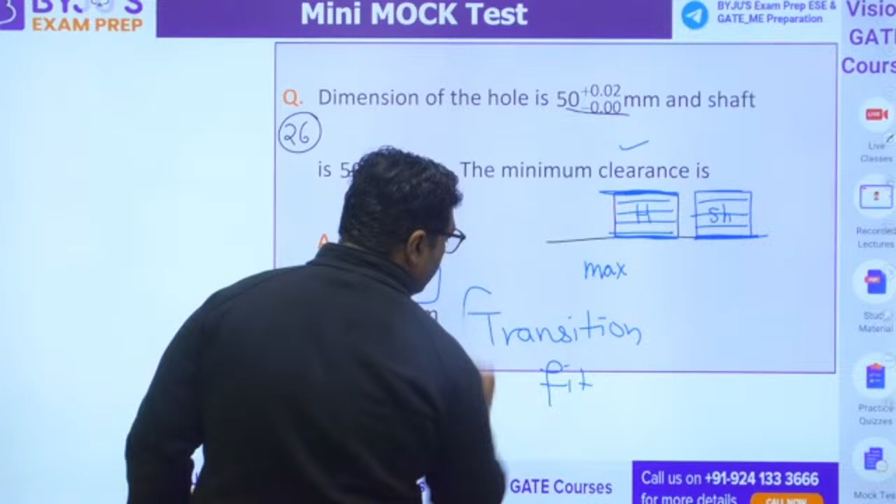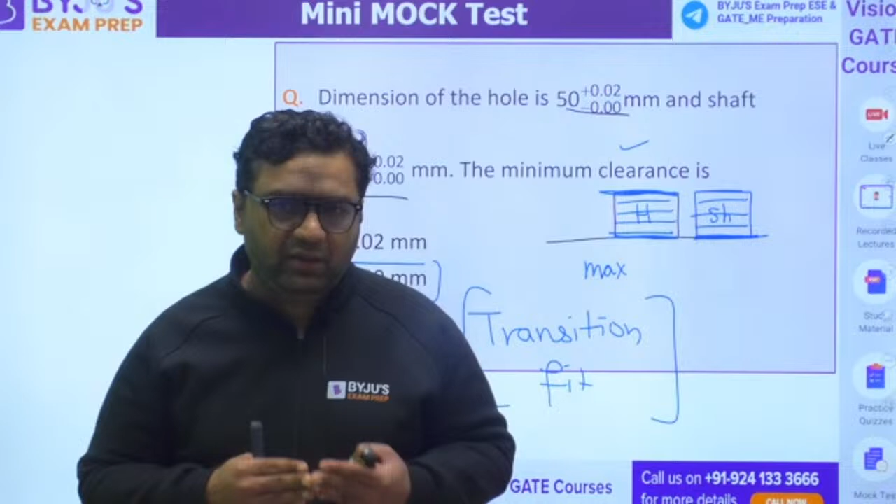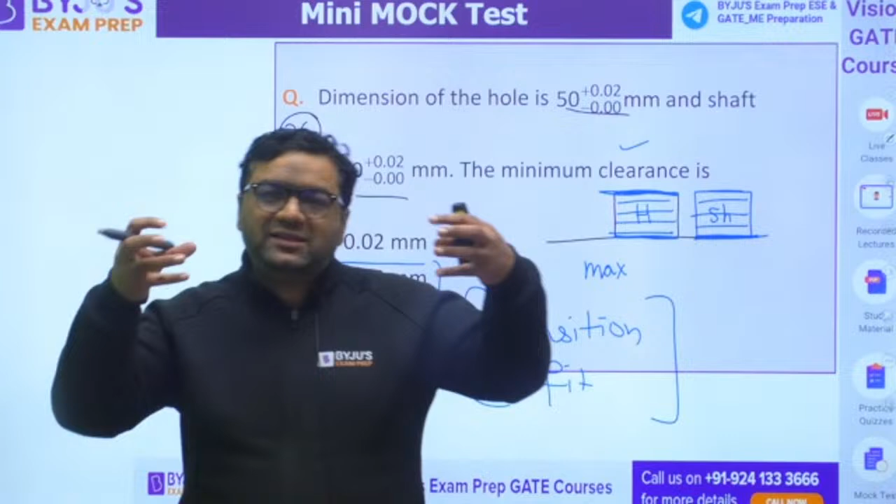Aniket, when we are having this type of fit, first of all, it is not necessary - who said that it is necessary? Whenever we are going for compounding of cylinders, we go for interference. So all have their applications. Like when you are going for bearing, inner race and outer race are having clearance, but when we are talking about their connection with the balls, it is always interference fit. When we are going to have railway wheels, those railway wheels with the axles are having interference fit. What we do is we heat the wheels so that they can get bigger in size, and after that, when this is getting cooled, the axles automatically get fit. So the types of fit, every time we are not looking for clearance. So there we go for interference - in compounding of cylinders, in railway wheels with axles.

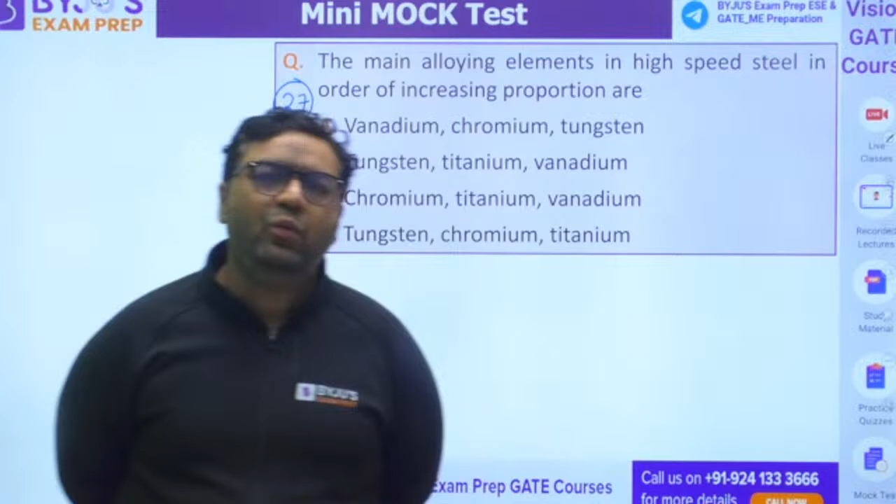So here they are saying the increasing proportion. When we are talking about high speed steel, you know tungsten, chromium, vanadium, and you say 18-4-1. Increasing order is vanadium, chromium, tungsten. A would be the right answer.

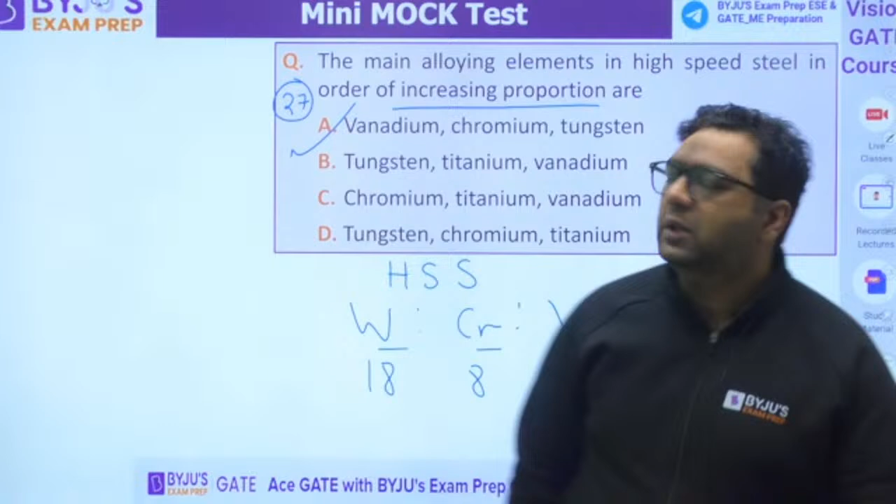Okay, moving to the next question. 28, inspection devices. Two more questions. You must have seen in HPCL also many questions were there from inspection devices. In ISRO also we can expect. Sorry, I have written it wrong. Actually, yesterday night I did not sleep well, so that's why my brain is not working properly.

Okay, fine. Yes, surface roughness on a drawing is represented by - actually I am writing something else, in my mind something else is going on. Yes, tell me, what would be the answer? So surface roughness we show like this, with two triangles, with single triangle, with three triangles. So answer for this is going to be triangles.

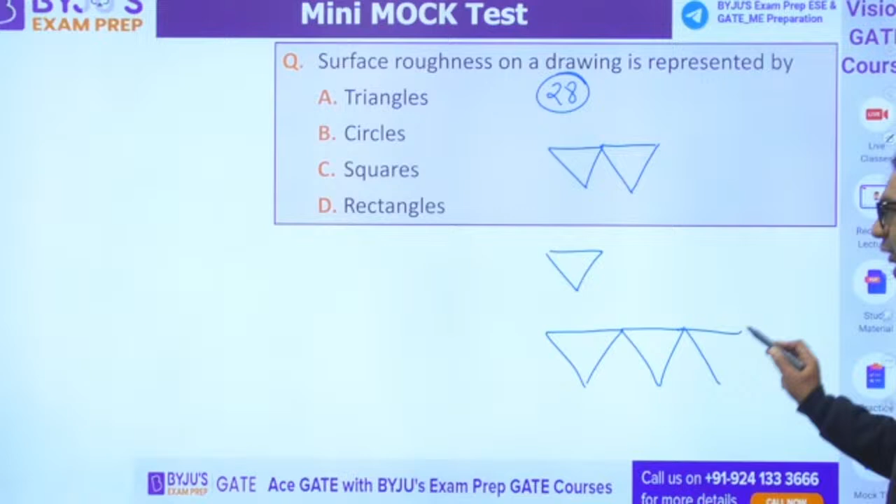Very good. Next question, probability. A husband and wife appear in an interview for two vacancies for the same post. The probability of husband getting selected is 1/5, while the probability of wife getting selected is 1/7. Then find the probability that any one of them getting selected. So you can say that you need to find out the probability of any one - A or B.

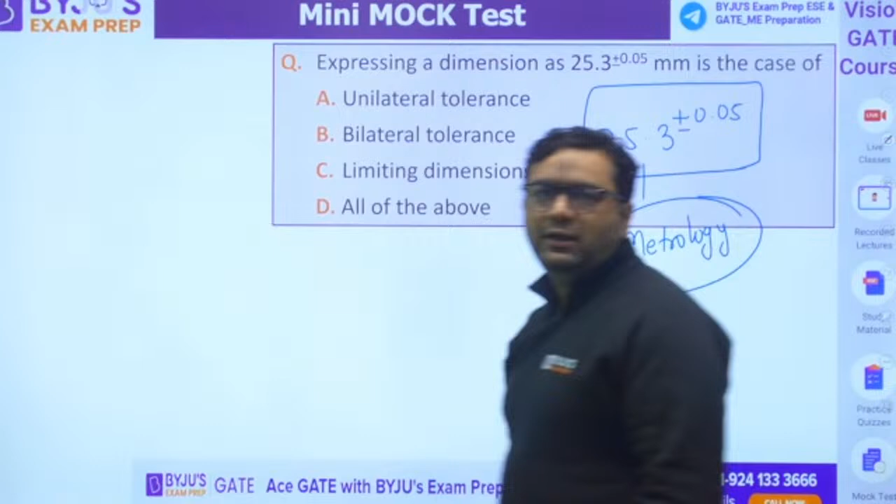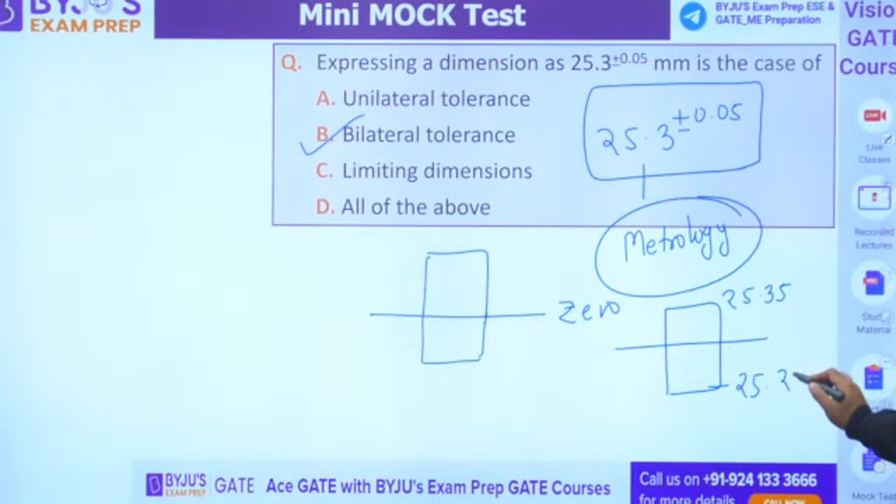Everybody, it is the case of bilateral tolerance. Because if this is the zero line, if tolerance is on both sides, we call it bilateral tolerance. Vaibhav, you understood? Answer will be B for this, because when you make it, it will be coming like this. It is 25.35, this will be 25.25, and this is 25.3.

Moving to the next, last question. In comparison to an open loop system, closed loop system is more stable, more accurate, more complex, or all of the above. This is from Computer Integrated Manufacturing, CNC, Advanced Machining.

All of the above is going to be correct, because it is going to be more stable, it is going to be more accurate, it is going to be more complex, so answer will be D. So guys, as in ISRO, you are not going to get MSQ, it will be MCQ only. So the answer will be D for this.

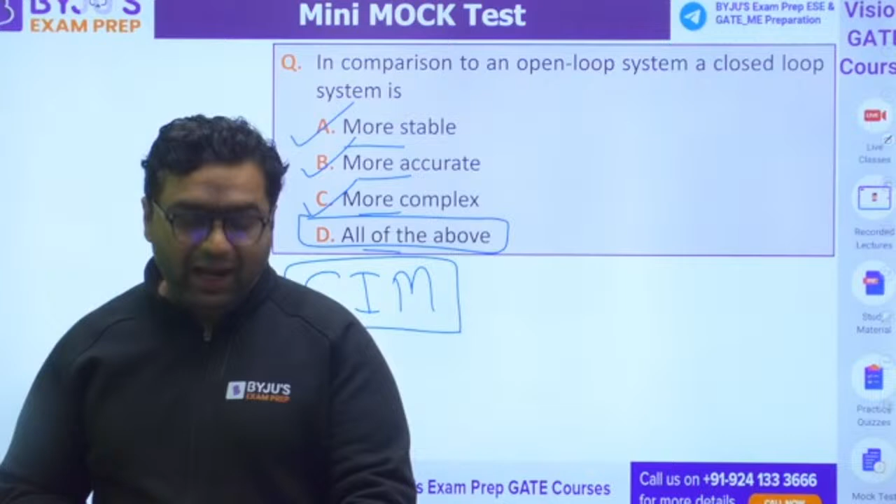Now I would like to ask you guys, would you like to have these mock test type of sessions for all complete subjects from next week? Would you like to have the entire full mock test? Because now the last week is coming, so by then we are expecting you have done almost all the subjects. So shall we come up with the entire complete mock test? I was planning to have at least 2 complete mock tests including all subjects.